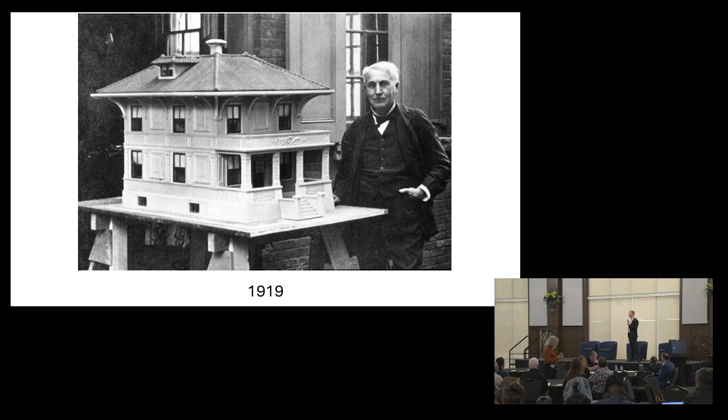Well, Edison built about 100 of these, and more than 95% of them are still in use today, about 100 years later. It's pretty awesome, right? Pretty amazing. But Edison's benefits, this is what his marketing terms were. He said, I'm going to build you an insect-proof, a mold-resistant, a home that does not rot, a home that's fireproof, a home that's designed for extreme events, a structure that will outlive the builder. But I'll tell you, Edison got that last one wrong. It didn't just outlive the builder, it outlived the builder and the builder's kids and the builder's grandkids and who knows what else. And that's the potential that's out there with well-built infrastructure.

And that's why people build concrete homes now. Not everywhere, but certain places people build concrete homes. Now, 3D printing is pretty cool because you don't need much of that formwork. Remember all that formwork I showed you earlier?

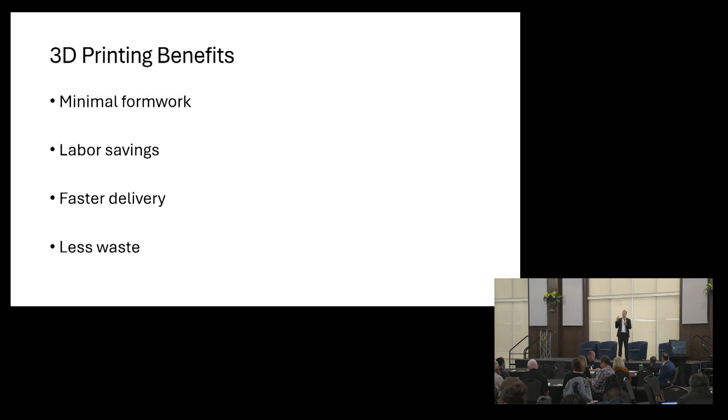Pretty complicated, pretty crazy, right? You don't need any of that anymore - it goes away. There's labor savings involved as well. There's faster delivery, there's less waste. There's so many benefits.

And people love to say you're going to get all the benefits of concrete with X% reduction in price. It's like, what is this professor doing? Put an X up there - what's the number? How much money is it going to save me? And people honestly don't know right now. They don't know how much money 3D printing is going to save them.

But actually, today, with modern techniques that most folks use, 3D printing is more expensive than conventional construction. And so they're like, well, why would I ever do it then? And you're right - that's why it's not everywhere.

But get ready, get ready. I think long term, X is going to be about 30%. So imagine buying a home, but it was 30% less expensive.

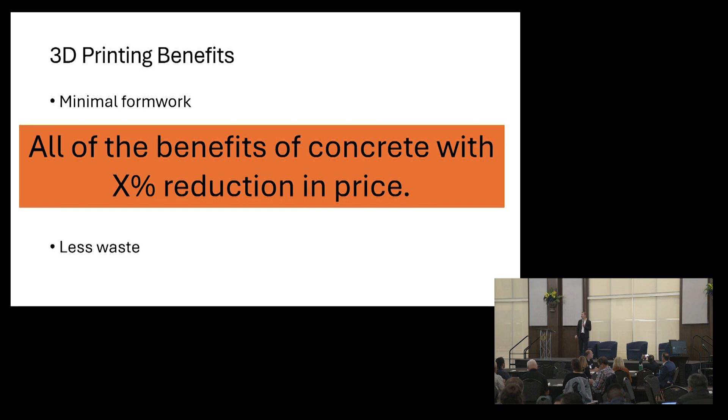Imagine your mortgage payment that was 30% lower per month. Could you find something good to do with that money? I know I could - I could definitely find something good to do with that money, and I bet you could too. And a lot of other people in the audience could as well.

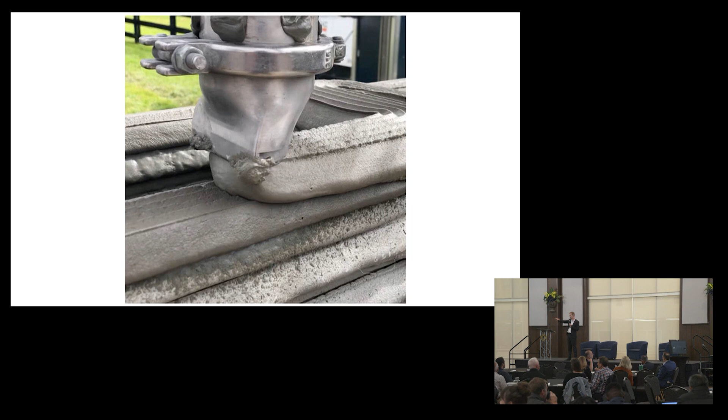Well, concrete? Is it really concrete? Does anyone see any rocks in that? Come on, geotechs, do you see any rocks in there? No, the geotechs - they don't want me to talk to them. But there you go, there's no rocks in there. There's sand, cement, and water. That's mortar, okay, that's in there. That's not really concrete, that's mortar, but that's what people are printing with today, right?

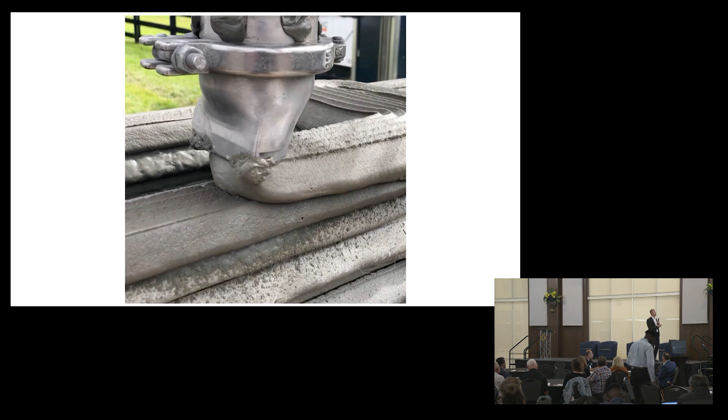And they look like this. Who thinks this is beautiful? I have yet to find - we got two people, right? Most people do not think it's beautiful. A few people do, okay.

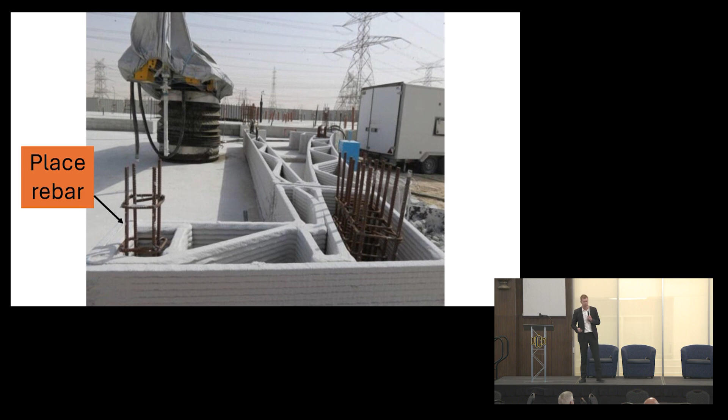But they usually print these cavities inside their concrete walls, and inside those cavities they put in rebar. See, rebar in there - wow man, this thing is not doing very well. They place rebar in there, then they fill those with concrete, and that's a lot of steps for 3D printing these days. A lot of steps.

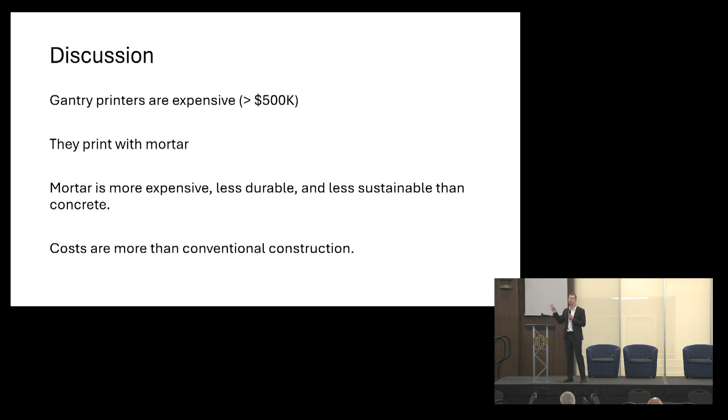So gantry printers, these overhead printers, are expensive. Most are around $500,000, all right? They print with mortar. Mortar's more expensive, less durable, less sustainable than concrete, and it costs more than conventional construction right now. It does, and that's why it's not widespread.

But now let's go back to 2017 for a second. Go back in time, see what's going on. This is Paul Tikalsky - he is my boss's boss. My boss is over there, but he's my boss's boss, right?

And he sends me an email one cold December morning. I'll never forget it. He says, hey, come and see me. And I'm walking across campus, I'm breathing - you know those cold Oklahoma mornings where you can see your breath, right? You can see your breath. It's that cold outside. I come walking, I get into his office, I take my coat off, I start to talk to him, say, hey Paul, what's going on?

He says, Tyler, I need a favor. That's never good when your boss's boss asks for a favor. And then he said, I need you to do something that you've never done before. Oh man, I was 0 for 2. And I felt in that moment that the room had just dropped 40 degrees in temperature. I felt like I could see my breath again in front of my face. It was amazing, it was crazy, it was chilled to the bone what's going on.

I said, well sure Paul, because this is a visionary guy, this is a guy I look up to. I said, how can I help? What's going on? He's like, our engineers today and our architects and our technologists are very focused on what they do, and they need to learn how to work in teams, how to work on multidiscipline problems, because the world's problems are solved by teams. We don't just do one thing, we do multiple things together.

You guys ever noticed that before? Anybody ever noticed that before? Geotechs, no, they don't know that. Everyone else though? Yeah, you've seen that before? Excellent. Well, that's awesome, because that's what he saw too.

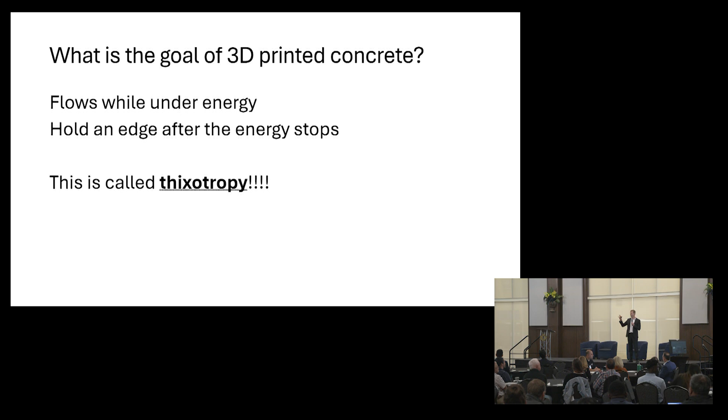What is the goal of 3D printing concrete? We want concrete that flows under energy and then stops as soon as that energy is actually taken away. And this, ladies and gentlemen, is called thixotropy. Ooh, that's the science word of the day, thixotropy. And if you don't know what I'm talking about, it's ketchup, ladies and gentlemen. We're making concrete that acts like ketchup. We actually studied ketchup intensely on why ketchup works, what ketchup is all about.

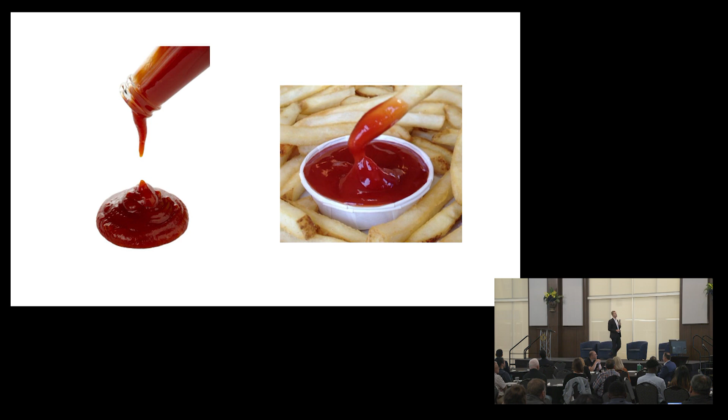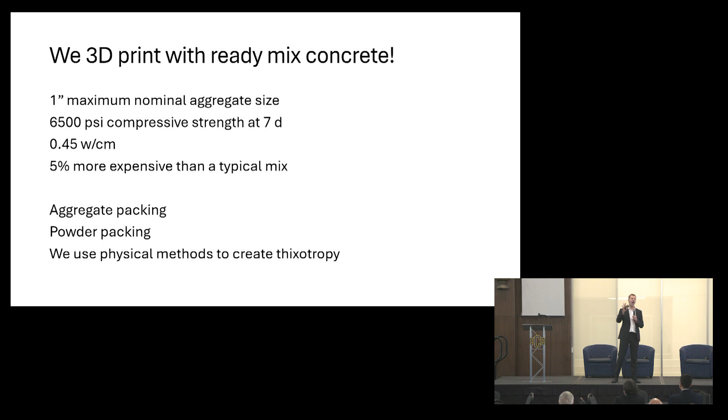Very, very big thing. So we make our concrete do this. But our concrete, we use 1-inch maximum nominal size aggregate, so large rocks. Our concrete is 6,500 PSI compressive strength at 7 days - we're not designing for that, that high strength just comes along for the ride. We use a 0.45 water cement ratio. Our mix is about 5% more costly than a typical mix. And we do this with aggregate packing, with powder packing. We use physical methods to create that thixotropy. Now, I'm not saying I don't use any admixtures at all - we do, admixtures are important - but we do it with physical methods. Because if you rely on chemistry for everything, then you're gonna have non-robust mixes in the field. So we'll rely on physical methods.

So let's talk about how this works. Notice that thing in orange there - that's our pad we're going to drive on. That pad needs to be level. It doesn't need to be made out of concrete, although it'd be amazing if it was. It can be anything, just stabilized soil, something level. Then we have a footing - does everyone see the rebar sticking up out? Does that make sense what I'm saying? Rebar - we print around rebar, ladies and gentlemen.

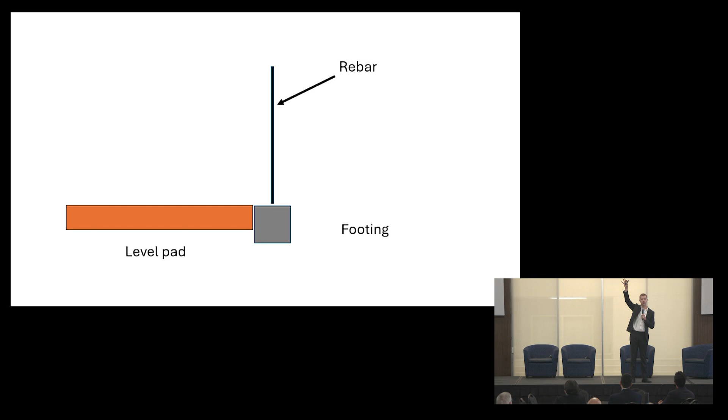So we have this cartoon here. This cartoon, it's got a hopper. The concrete goes in the hopper. We have an auger in the bottom that spits the concrete out. We have an arm that goes up and over the rebar and catches it on the other side. So everything happens in that box. It smooths it, it consolidates it, it finishes it, it gives us its form - it does everything. That box is magical, and I'm going to show you all about it coming up.

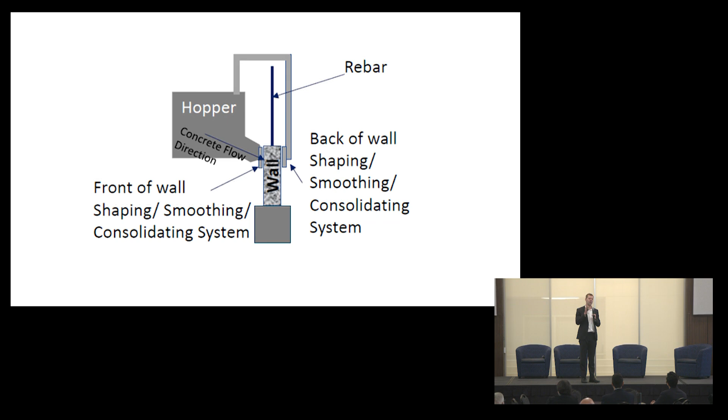This is what it looks like. So we see the hopper on the right. You see this extruding nozzle at the bottom, which I'll talk about in just a second. You see the magical box, and does everyone see that little tractor in the back? See the little white tractor in the back? Because, ladies and gentlemen, that's a skid steer or a tractor. And what we like to say at Oklahoma State is if you can rent a tractor, then you can print a house or a wall or a bridge or whatever. And I've already seen it in the faces. What?

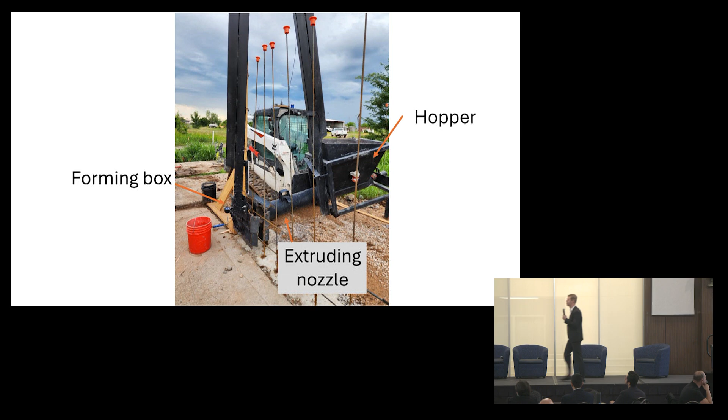Really? Yeah, hold on to your horses, ladies and gentlemen. Now, in that nozzle itself, right there, what's in there?

That in there is very important. There's an auger in there. If you don't know what an auger is, it's a screw that spins, that pushes material from one side to another. Pushes it, pushes it, pushes it, right?

And this thing is called the BAM printer, because you got to have a sweet name, right? And BAM stands for the Box Auger Method printer, because the box is really important and the auger is super important as well. So let's jump in.

So there is the BAM getting all lined up there. Rebar's already in place. The only formwork we have is at the very beginning and at the very end, right? And then there's the auger. There's everything lined up right there.

And let's look at this box. This box is magical. So many cool things happen in this box. So let's look inside of it.

Now there are 6 flaps to this box, 2 in the front and 4 on top. They all have hinges, so they can open and close again and again and again. So you can open it up if you want to get in the box, or you can close it down because it will consolidate inside that box, and I'll prove that to you coming up.

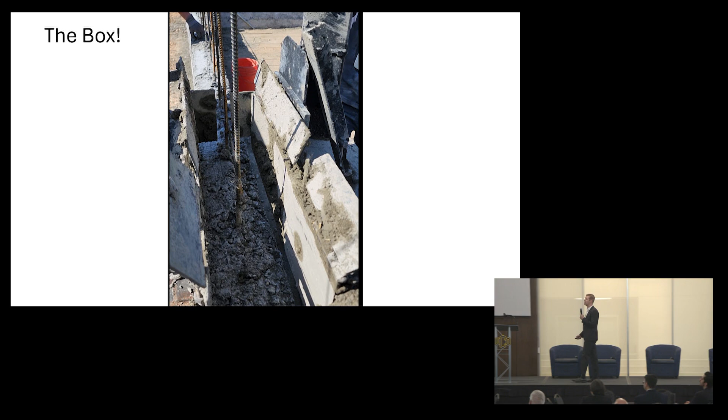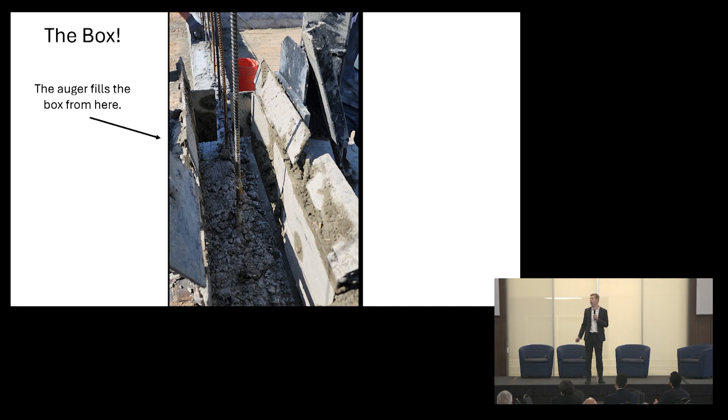Now on the side there, we actually spit concrete out from the side. We have an auger that spits it through the wall. So most people print from the top. We print from the side. It's really important because we can print around rebar that way. See the rebar? We're going to print around the rebar on the structure.

Still don't believe me, I get it. Here's the box, everything's closed down. See the rebar coming out there? Let's keep an eye on it. See the concrete? As soon as the concrete comes out of the top, as soon as it squeezes out of the top, you drive forward, ladies and gentlemen. And as long as it's squeezing out of the top, you know you are consolidating, you know you're getting the shape, you know you're getting the form, and it goes again and again and again.

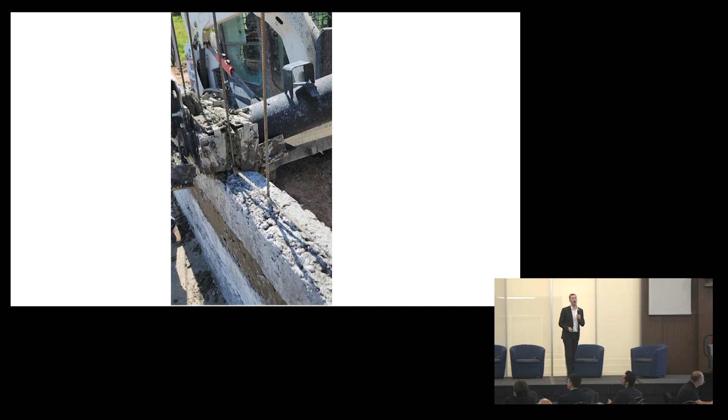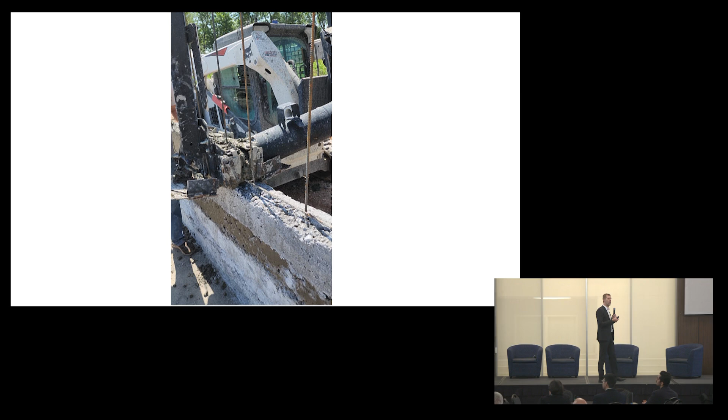And there it is, the same box from the other angle. That was the back, this is the front. Look at the concrete, you see it kind of creeping out of the front like ketchup? There it is, creeping out, creeping out. As long as it's creeping out of the front, you're good. You're getting the consolidation, you're getting the form, you're getting everything you want.

Pretty awesome, pretty simple, and we just do layer upon layer upon layer. People love to ask all the time, well, how long do you have to wait between layers? And the answer used to be about 30 to 45 minutes. But we have a new technology I can't tell you about yet that you don't have to wait at all. You can print immediately on top of one another again and again. You can back printers up. If you want to have 3 printers back to back to back to back, you can print again and again.

And we print 8 inches wide and 8 inches tall. Now, if the concrete is perfect, then we can do 16 inches tall, but it's tough to get perfect concrete in the field. If we're making it in the lab, not a problem, but in the field, it's a little more challenging. So here we go.

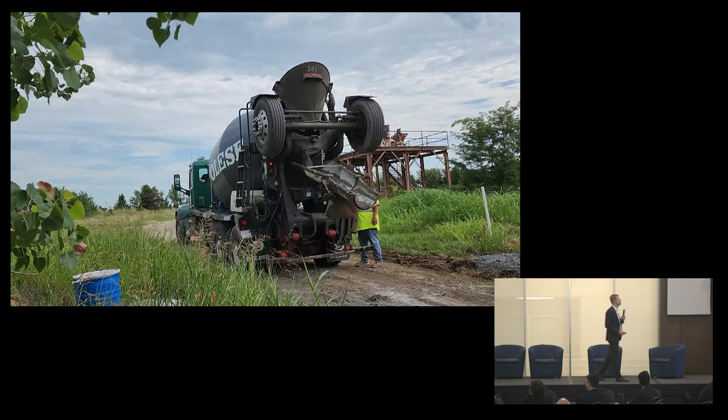Oh, look at that, look at that truck. Do you see that name on the side? That's a great company, Dolese. Thank you, Dolese, for all your help that you've given us on this project. I appreciate you. We did this with ready-mix concrete, local ready-mix concrete produced in Stillwater, Oklahoma.

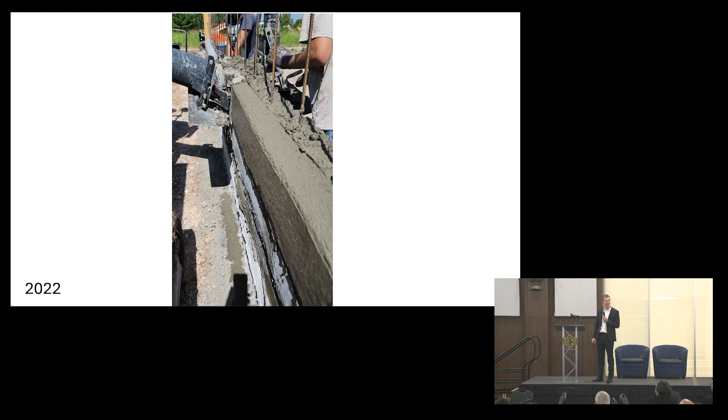And there is one of our prints. Now look at that left-hand side, isn't that looking good? Man, that's looking good. Well, what's going on the right-hand side? Well, one of our hinges broke, so we had to have a human pack it down. Just keep printing. But look at that left-hand side, looking good. That's 2022, okay?

Here is the middle-of-the-road mix, not the best mix, not the worst mix. And I'm having problems, 2022, we can see some surface voids. Now, one thing that's cool about this mix is you can finish it and fix it right there.

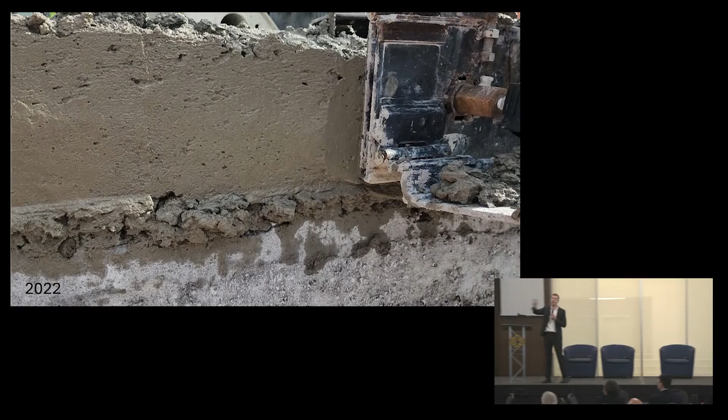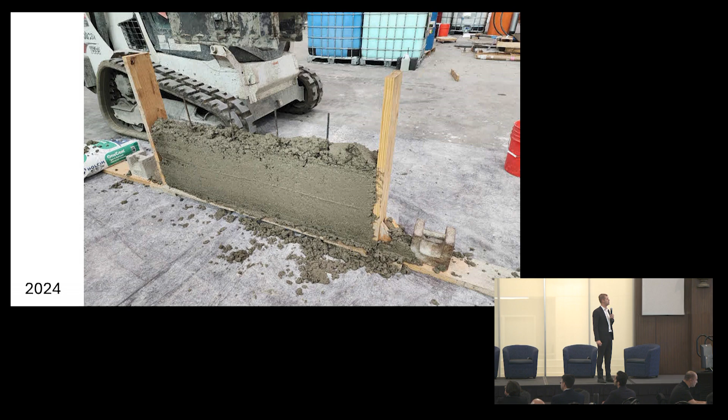If there's any problems, you just fix it up, whatever you want, right there. Pretty cool, right? Now here is 2024, this is about 2 weeks ago. Much, much better. We've come a long way in our mix in the last 2 years. Here's the other angle. Pretty cool.

You can do other cool stuff with this concrete, like this is me, and then you can just carve into it. That's 30-minute-old concrete. I carve into it about 3 inches and do an 8-inch wide thing. Doesn't collapse, nothing wrong, and I can patch it up immediately.

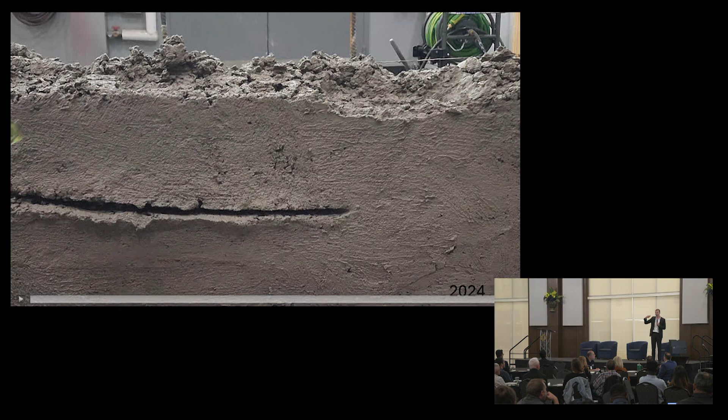Architectural folks, I don't know if there's any architects in the room, amusement parks have seen this, and they're like, holy cow, you know what I can do with this? They want to carve murals and stuff, and I can't wait. Can't wait. See like the Oklahoma land run carved in a concrete wall? Oh man, let's make that happen, right?

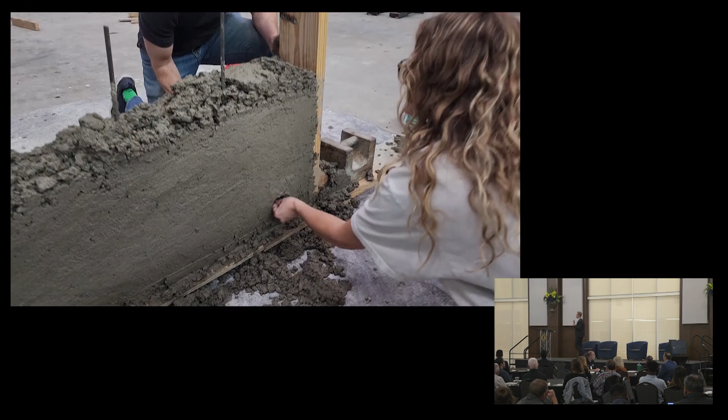Now here's another cool thing. Here's me kind of pushing, and what I end up doing is I take my entire trowel, my hand tool, and I just poke it entirely into the wall. And then there it is. There's my hand. Doesn't collapse. And then I patch it up.

I just patch it and finish it. This is a different kind of concrete, ladies and gentlemen. This is a different kind of concrete.

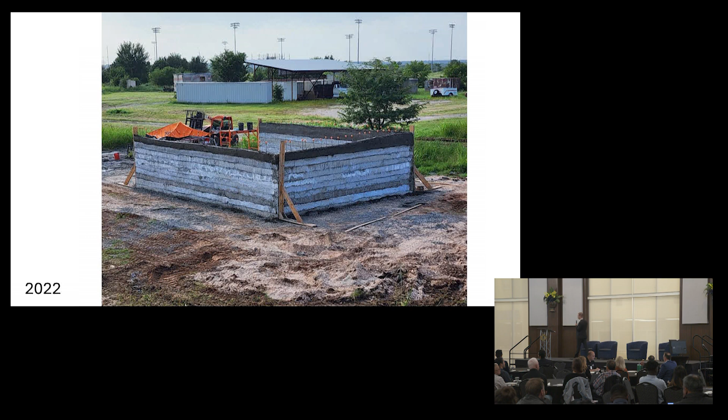Crazy, right? We printed a building, 2022. Pretty cool, 8-foot high walls, right? We printed a 30-foot by 20-foot building, 8-foot high walls. We did it in 14 hours, with $2,000 of rented equipment, $4,500 of concrete, okay, $6,500 total.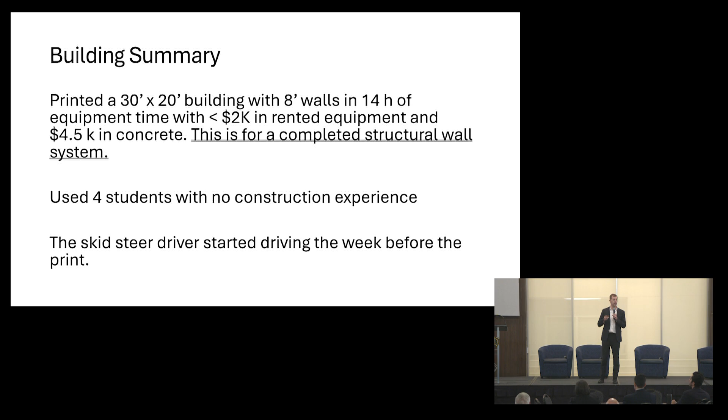We used 4 students, ladies and gentlemen, 2 high school students, 2 college students, no construction experience, okay? The person that drove the skid steer had never driven a skid steer till the week before. This is not an experienced group of people, ladies and gentlemen, that are able to do this, but our students are amazing, all right? This building is a research storage equipment facility for 2 environmental engineering faculty members.

We improved our designs, we filed 2 new patents, but we got real world costs. That's big time. Our 3D printed wall, now this is for an 8-inch thick concrete wall, 8-foot high with typical labor, not my student labor. I took how much time it took each one of the students to do all the work, took out their cost per hour, put in typical labor cost per hour, $12 per square foot.

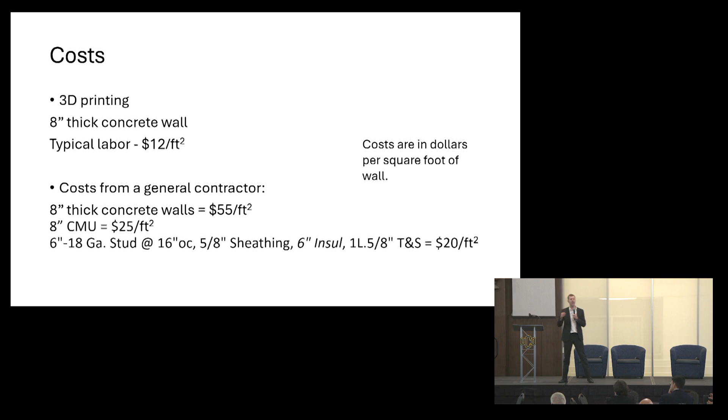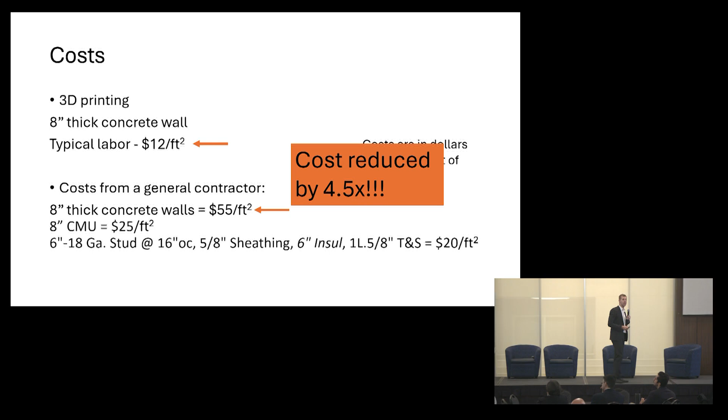You're like, well, that sounds cool and all, how does that compare to real world stuff? There's real world stuff from a general contractor for cost. 8-inch thick concrete walls, $55 a square foot. That's their cost in place. There's CMU, there's 6-inch 18 gauge stud. That's a 4.5 times reduction in cost.

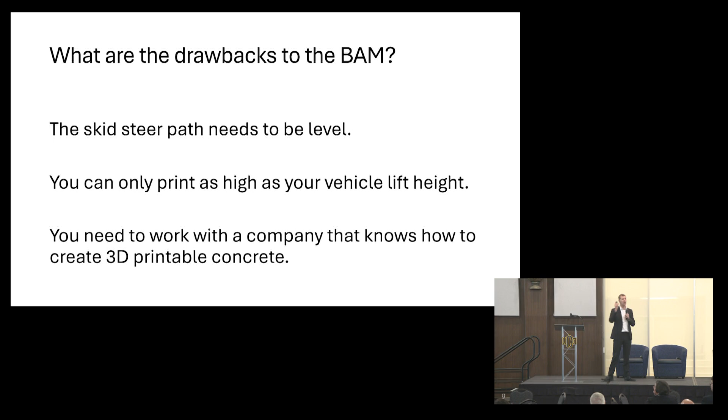So what are the drawbacks to the BAM? Well, you got to have a level path, and you can only print as high as your vehicle can lift. And you need to work with a company that knows how to create 3D printable concrete. Thank you, Delisi, I'm glad you exist. All right, you need to be able to adjust concrete in the field. That's a big deal, and it is not automated yet.

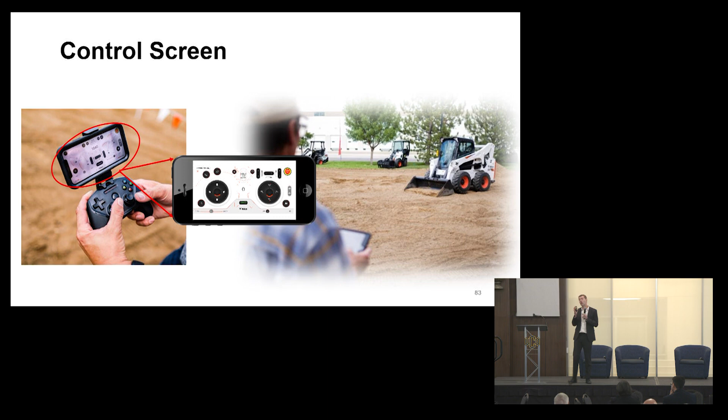We're working with Bobcat now where we can actually control our entire thing with our phones. We can hook this up to a video game controller. The students loved it, or at least we're in the process of doing that. And it's like playing concrete video games, right? Pretty awesome, right? But we're actually doing this in the lab. There's no driver, ladies and gentlemen.

There's no driver. So you remember the 4 folks I had before? I could easily do that building now with 2 if everything was perfect. But in construction, not everything's perfect, so 3 is probably where you need to be. But what's next? Make everything better, add automation, get the feedback from industry. That's a big deal. So, hey, do you know someone that'd be interested in this? That's my big call to action.

Do you know anybody that would think this is cool? Do you want to come see it in action? Do you want to come see our building that we've made? You can email me, talk to me.

So in summary, 3D printing with a tractor has shortened our construction time of this building by about 7x, reduced our cost by 4x, reduced our number of workers by 2x. Those are the 3 big challenges that I said were facing us today. This is a way to attack all 3 of those in what we do.

And this is all compared to conventional cast-in-place construction. So listen, this has been a cool day. I always love coming to this event. And listen to me right now. If you're at this event, then there's a little piece of you that wants to make the world a better place. And for this quote, oh my gosh, what is this?

This quote is for you. It's not easy. It's easy to say, it's not my community, not my world, not my problem. Then there are those people who see a need and respond. And I consider those people my heroes. And if you're here today, you are one of those people, and you are one of my heroes. Thank you so much. I appreciate you. Take care.

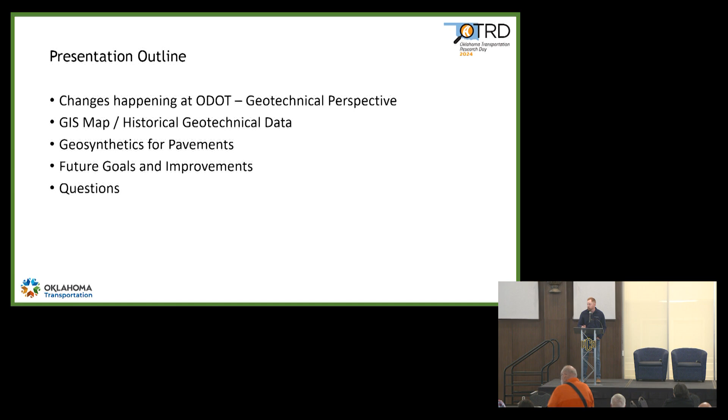Yep, there we go. So what I'm going to talk about is the changes that are happening in ODOT. There's a lot happening, not just in geotech, but I'm going to focus on the geotech side of it. I'll talk about a GIS map that Scott's group in materials has been putting together and the benefit of that, and how it's going to help the geotech industry going forward. And then I'll talk about geosynthetics for pavements. It's a big topic. Let me just grab this. It's a big topic that has been brought up ever since I started, and we're going to talk about how we're going to implement the geosynthetics, get the most that we can out of them, and hopefully save money in the long run.

And then talk about future goals. This is only a 15-minute presentation. I'm going to keep everything very surface level, but talk about future goals with ODOT when it comes to geotech and improvements we see making, and then I'll hopefully answer a couple questions at the end.

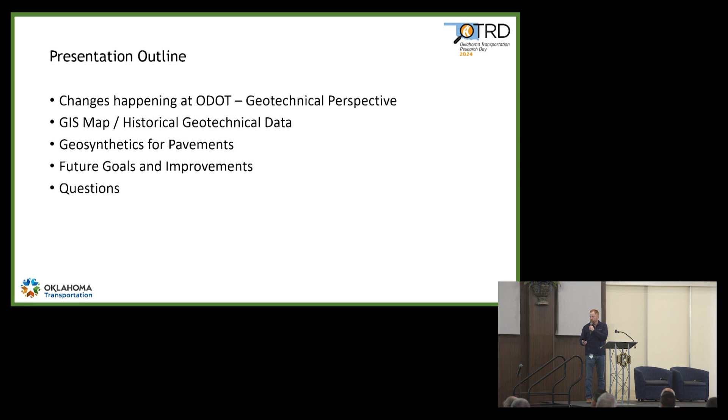Hold on. There we go. All right. So the geotech group at ODOT, I started about 18 months ago now, and I'm the design geotech engineer. The job didn't exist before that, so they kind of put me as a central figure to coordinate between the geotech consultants that we rely on, and then Scott, who manages the materials group, and then the pavement design engineers that work in the roadway division and the bridge division's geotech engineer. So I'm kind of the central source.

I help a lot with processes and helping them, if they do need some technical help. For the most part, they have their technical stuff figured out. But my main role is to help be the central contact with the consultants, and help them understand what the expectations are from ODOT, get the processes that they're following to be consistent from company to company. Yeah, basically trying to be a central point of contact. Before, ODOT had all these different people they could contact, but they didn't always know who to contact. So for geotech, I'm kind of the main deal, and then I'd obviously reach out to Scott or Amanda with pavement design if they need more technical help.

So changes happening at ODOT. Consultants - we've grown a lot more reliant on them in the last couple decades. I'd say up to about 2000, ODOT did the majority of the geotech work in-house. But with the amount of workload and how personnel has changed, consultants have taken on more and more of that task as we've gone. So as they've taken on more of a role, we've obviously grown dependent on them, so we need to take care of them.

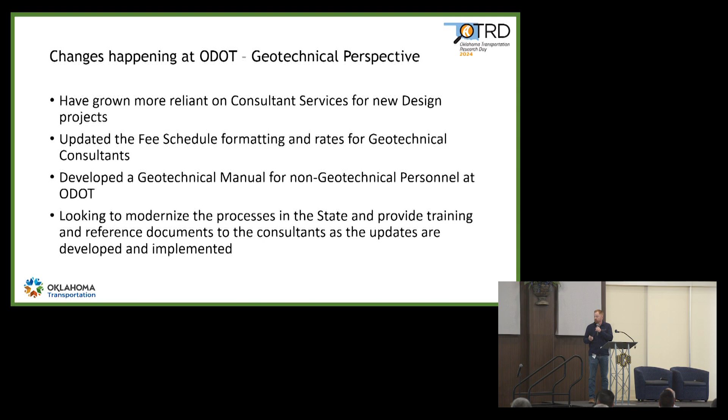Let's see if I get this to work again, hold on. All right, GIS map - this is Scott's group, they've been working on this since I showed up, and this is going to be a super cool tool going forward. I'm hoping it'll be used for decades, generations to come.

Geotech data - you're working with soils and bedrock information, and it's not changing all that much. The soil is what it is in an area, the bedrock elevation isn't changing over time. ODOT has a lot of data, so much data. Using that data to improve our processes going forward, and not having to pay for the same service over and over again at a similar location, is kind of what we're striving for.

So Scott's group had these boxes - how many boxes do you think you had, Scott? Just filing, yeah. So the old geotech submittal format was just a hard copy of a bound report up until about maybe 15 years ago.

Since then it's been all PDF, but before that, for decades it was just a hard copy. They'd send some to ODOT, and after they were used for that particular project, they'd go into a box and get stored - copies were made, of course. Well, all this information is good information. There's good soil information in there, a lot of good stuff.

You can get groundwater information, all this stuff. Potentially that stuff could have just got thrown away, never to be seen again, but the direction we're going is, hey, this is good information. Let's not lose history. Let's scan it all, which Scott's group and Chris have been doing for a while, saving it into a GIS database to where it's going to be searchable, usable, not just for ODOT, but for the consultants going forward.

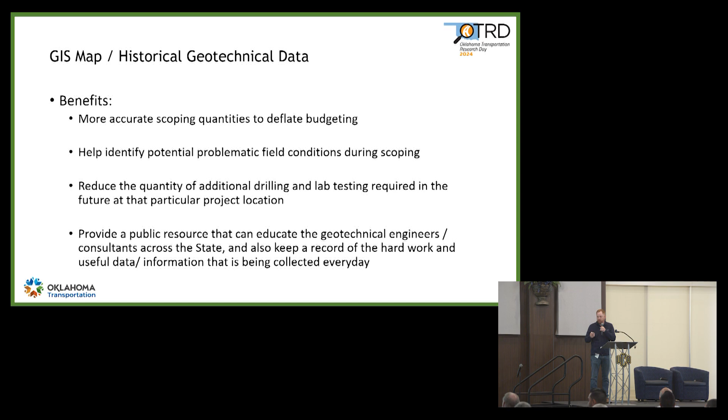I would have killed for this as a geotech consultant, just having this much information available. You can search by county, JP number, the year the report was done, all these different types of reports - pedologicals, bridges, all these things. You'll be able to search it, find information, try to find stuff that applies to the project you're scoping. It's going to be great whenever it's all done.

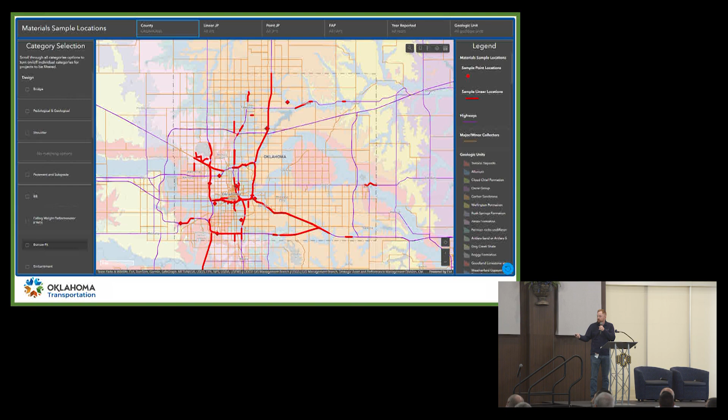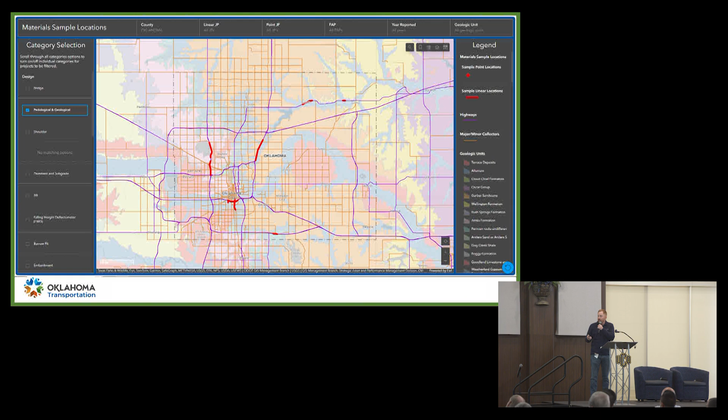So for this presentation, I just showed you an example of what it can do. I picked Oklahoma County because that's where we're at. So what you do is click Oklahoma County, it zooms into the county, shows you all the projects within that county. Then say you want to see an example of a pedological report - it'll zoom in and show you where the red is, where the pedologicals are. You can see there's probably about 7 or 8 pedological reports for the county stored in the system.

Say you have a project maybe like in Arcadia on Route 66 - what's the soil information like over there? You can click on the red and it'll highlight that and show you the report, which I didn't go through showing all that, but you can get the report from there, get the JP number assigned with the project that the study was done before. With that, you can potentially ask for as-built plans. You get all this information that was done previously, and you're not basically starting from scratch as a geotech, which is a lot of times how I felt. But having additional information makes you able to make more educated plans, more educated scoping plans, and helps the project as a whole go better.

So to reiterate, the end goal of this is to save ODOT money by not doing redundant testing and drilling, allow geotech consultants to provide reduced scopes and more accurate budgets, and create this digital library. I love the idea of having a geotechnical library for ODOT stuff. This can be continued for 100 years, and you'll have all this data from the 1950s all the way up to what we're doing now. I think it's going to be very helpful.

And then eventually, with AI, maybe there'll be a way we can search this, and you can have some sort of system in place where you can look up these old reports and get data from that. That's out of my league, obviously - I'm a geotech engineer, I don't deal with AI very much, but I think it'll be useful.

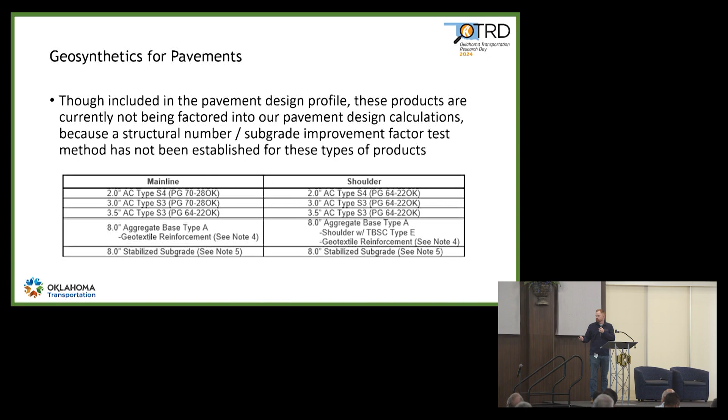So geosynthetics for pavements. This is a big topic that has been brought up since I started. The main purpose geosynthetics serve in a pavement situation is they either provide separation of the base layer with the soil, filtration with water, and subgrade stabilization if there are soft subgrade conditions. The geosynthetics we use are woven geosynthetics that claim to provide all three of these services, giving you the filtration and separation that a separator fabric would do, but also the reinforcement that a geogrid would do.

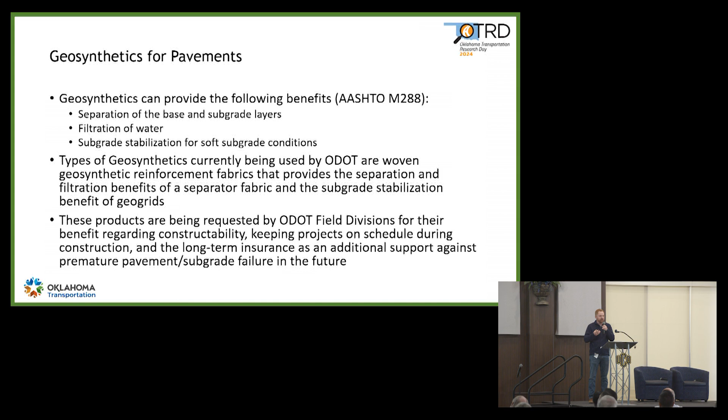These products are typically requested by the ODOT field divisions due to their help with constructability. Whenever you're building a road out in Oklahoma, say you do all the earthwork and there's a massive rainfall event that comes in, you can delay the project by quite a bit because you have to wait for everything to dry and may have to rework the soil. What they've been doing is stabilizing the subgrade in areas where that's allowed, then using these fabrics as a cover to protect the subgrade.

All of this is great - it's good to use, but there should be some sort of structural benefit to that as well when it comes to pavement design. Right now we have it in our pavement design sections, but we're not actually using it structurally - you're not able to reduce anything from that. So our goal is to see what benefit you get from these products structurally, and then be able to save money by thinning up the asphalt, potentially reducing the aggregate thickness, that kind of stuff.

So this is an example of what a pavement section looks like these days.

We obviously have asphalt or concrete, and then you'll have your ag base, and then you have this geotextile reinforcement, which is these geosynthetic fabrics over stabilized subgrade. It's a lot. The actual structural calcs are mainly handled by the asphalt and the aggregate, and really everything below that is not really structurally being used.

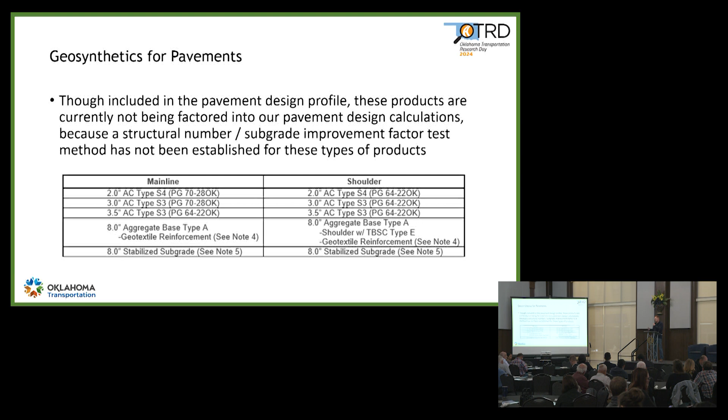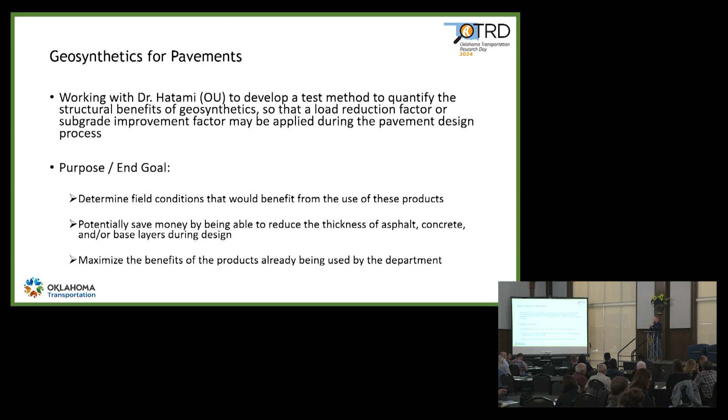So going forward, we'd like to, since we're paying for it, know all that it does and hopefully get all the benefits out of it. So we just started this project with Dr. Hatami where we're trying to develop a test method to quantify the structural benefits of geosynthetics, so that a load reduction factor or a subgrade improvement factor may be developed. The idea is to be able to thin up these sections and structurally apply it into either Pavement ME or AASHTO 93 as you do your calcs.

Determine field conditions that would benefit from these types of products. Like I showed you before, we currently are using it in situations where the subgrade is already stabilized. I don't know how much of a benefit you're getting whenever you have a hard underlayer with these kinds of fabrics. Obviously, you need some sort of deflection for the fabrics to really provide a structural benefit, but that's what we're going to figure out from this research. What situations does it make sense to use it? When do you actually need it for a structural situation? And if they want to use it for their construction, that's fine, but I want to make sure that we know when we can actually apply it to the pavement design process.

Potentially save money - that's always my number one goal with a lot of what I do - and then maximizing the benefits of the products the department's already paying for. So ODOT's already putting this on all their projects. Let's make sure we're getting everything out of them.

Okay, future goals. What is the new stuff coming up? There are a million things to update with geotech. We were kind of stuck in a certain way for a while, so a lot of the stuff we need to update. We are going to be looking at our geotech spec - that's basically our recipe book that we use for our geotech studies in the state.

I'm going to be working with Scott, and working with the designers, trying to figure out what design parameters are actually needed for everything, making sure we're doing the right testing, making sure we're not doing too much testing - another way to potentially save money. Just get that fine-tuned to where we can move forward, being confident that we're doing the right thing.

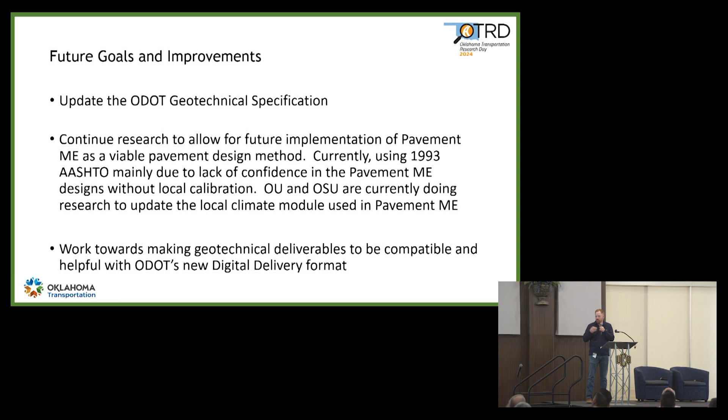That's a long-term kind of update that we're gonna be working on. Hopefully if I come back next year or the year after, I'll have updates on this kind of stuff too. Like I said, this is my email. If you guys ever wanna have any ideas, geotech research ideas, reach out to me. I can give you some feedback. I'll be happy to answer any questions if anyone has anything, for sure.

Of course, yeah. All right. Well, anyway, my email's there, so. Sorry about that. Just right. Great, thanks.

So in terms of what I'll talk about today, I'm going to talk about the evolution of this concept. As most things, people have tried different things and the concept has evolved to where it is now. We started with hollow core concrete columns, then concrete filled tubes, and now the double tube concrete filled that I'll talk about today. And then in terms of our research project, our specimen design, fabrication, testing, our forensic investigation, and then thank yous, and if there's any time left, questions.

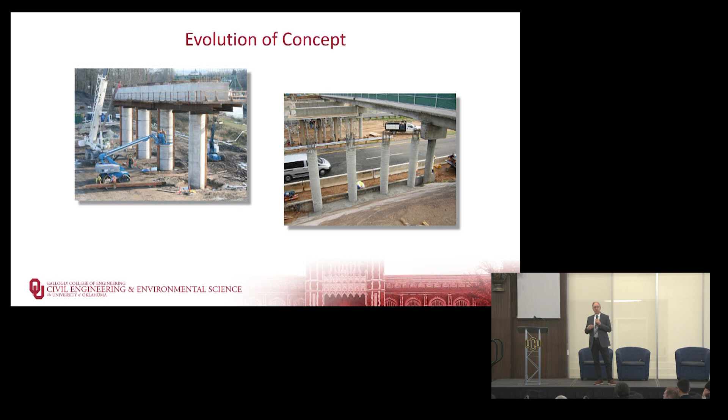I know I'm the last presenter before lunch, so you're probably not going to have any questions because you're hungry, but that's okay. So in terms of most of our bridge piers, most of the columns for our bridge piers are typically made out of reinforced concrete, typically circular, multiple piers supporting a pier cap. They can be rectangular or square. Sometimes you have the hammerhead shapes, but typically done out of concrete, cast in place. You have to build the formwork, the cage, you have to build the forms around it, you have to pour the concrete. And so there have been a lot of gains in terms of accelerated bridge construction for bridge superstructures, but not as much for bridge substructures. We're still doing a lot the same, and that's the concept that I'm going to talk to you about today.

So basically, we take a steel tube and an FRP tube, and then we fill up the center with concrete. So we call it a double wall concrete filled tube. The benefit is that these different materials help each other.

The FRP tube acts as a stay-in-place form. It also provides resistance to chlorides and other deleterious materials. The concrete core gives a lot of compressive strength, but also braces the FRP tube and the inner steel tube. And then the inner steel tube and the FRP tube provide confinement to the concrete, which increases its apparent strength. And then the steel provides the ductility and the flexural resistance for the column.

You have no formwork. All the final structure is the actual formwork. You have no reinforcing cage to tie and install. You simply construct it rather quickly.

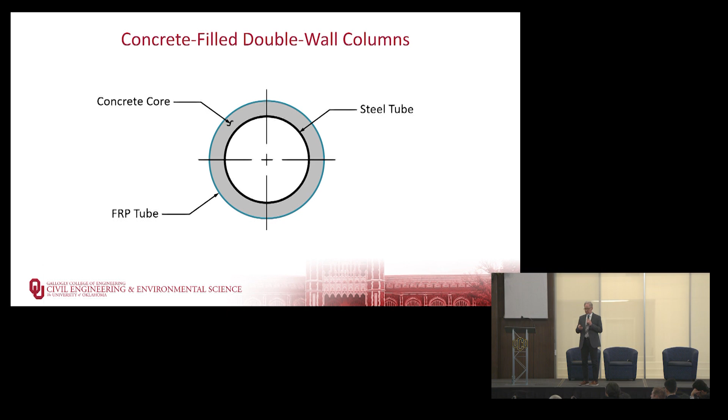So you pour your foundation. Typically, we do drilled shafts for a lot of our bridges. Put in your steel tube, get it in the right place, cast the concrete for the drilled shaft, come back and put the FRP tube on it, and then cast the concrete in the interstitial space between the steel tube and the FRP tube. And then you do that for all of your bridge columns, put the pier cap on, and you're done. So you could cast this column in a day.

As soon as you put the steel tube in, cast the drilled shafts, come back the next day, throw the FRP tube on, cast the concrete in the middle, the column's done. So very rapid construction. But then the question is, how does it behave, right?

As a structural engineer, I'm like, yeah, that looks a little, I don't know, right? Reinforced concrete, I'm very comfortable with. Steel, I'm very comfortable with. It's kind of new. As civil engineers, we tend to be a little conservative. So we had to look at it and how does it behave?

So a lot of researchers have done some studies on this with different construction pieces. A lot of times there's with normal concrete, different sizes, different test methods, right? A lot of our equations take a lot of testing and a lot of proof before we're able to use them. But there are some initial sizing guidelines.

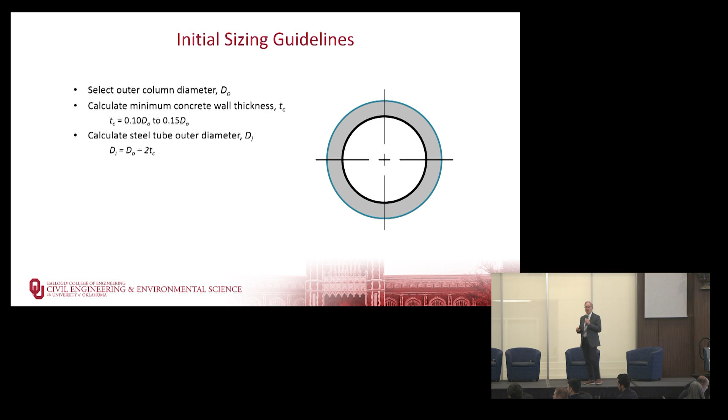You pick your outside diameter, which you can use typical column sizes that you use now to get started. And then you pick the concrete wall thickness, which is about 10% to 15% of the outside diameter. The steel tube diameter is based on subtracting the diameter of the FRP tube and the concrete to get to the steel. Steel thickness is somewhere between a 64th and a 32nd of the diameter. And again, these are guidelines just to get started.

Just like everybody knows, the structural engineers know that design is an iterative process. You don't know the answer till you know the answer. So some initial design guidelines help you get there quicker. And then the FRP tube thickness is based on whether you're in a low seismic area or a high seismic area, the compressive strength of the concrete, and the hoop tensile strength of the FRP.

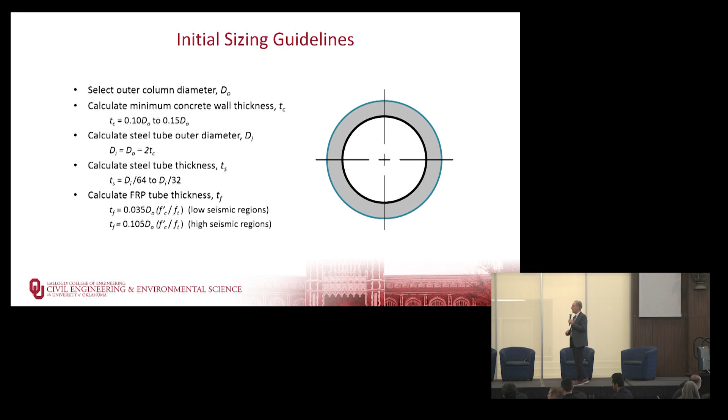So this is our test specimen. It has a concrete base, you have the column, and then a loading stub at the top. Essentially, it's a flagpole that we're going to push back and forth with cyclic loading, which is kind of how our bridge columns work.

So our column was 8 foot tall. The FRP diameter was, because of standard sizes, we want an 18-inch diameter column. It's about 18 5/8 of an inch. The tube thickness of 3/16, we went with the thinner value. The steel tube was 12 3/4 of an inch diameter, again, standard sizes, 1/4 inch thick. Again, we went with the thinner ones for these first set of specimens. And that gave us a concrete wall thickness of 2 3/4 of an inch, which is not a lot, but we'll talk about that in a minute.

The FRP is glass fiber reinforced polymer, standard tubes, 40 KSI hoop stress. And then the steel tube has a yield strength of 52 KSI and an ultimate strength of 66 KSI. So we're going to put a nominal axial load on these specimens and then push them back and forth in a cyclic loading.

We use high strength SCC, right? We want concrete that can flow very well to get into that 2 3/4 inch space. And again, if you have a concrete that flows very well, again, less labor involved. You just pour it in, you're done. You don't have to vibrate it. You don't have to do anything.

So we use high strength SCC with a compressive strength at 28 days of 10 KSI. And we used our UHPC mix we developed at the University of Oklahoma with a target strength of 20 KSI. Technically, UHPC is 21.7, but we figured doubling the strength would work well. And both of those concretes flow very, very well. Tyler showed you how essentially UHPC is also a mortar, right? It's just sand and cement and water and high range water reducer. So it's a mortar with fibers in it.

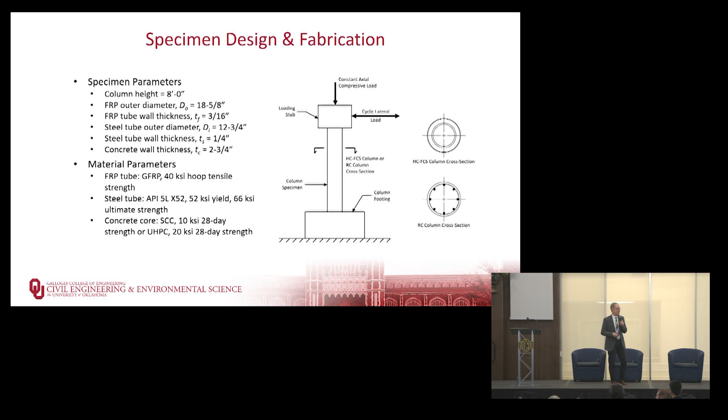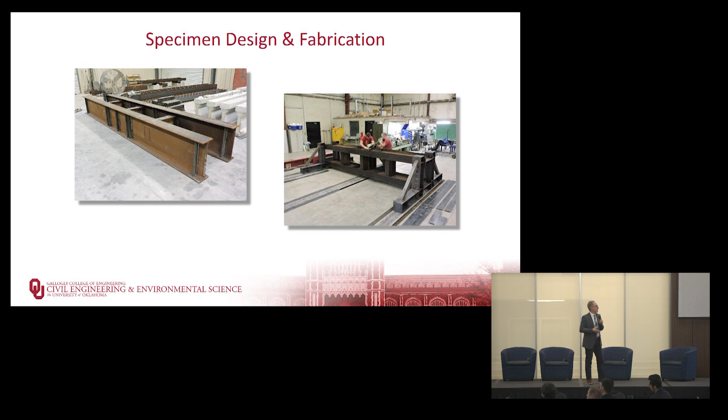Because we only have a strong floor out at our lab on the south campus of University of Oklahoma, it's kind of hard to test a vertical column. So we developed a test frame so we could lay the column on its side and then test it.

And these are the FRP tubes that came pre-cut, the steel tubes that came pre-cut, and then we built our specimens, and a reinforcing cage for the base.

So we built our formwork for the base, we put in a rebar cage, we put in our steel column at the right depth of embedment. Typically it's right now 1.6 times the diameter is the standard. Some of our research shows a little bit bigger value, but you want to make sure that steel tube doesn't pull out of your foundation.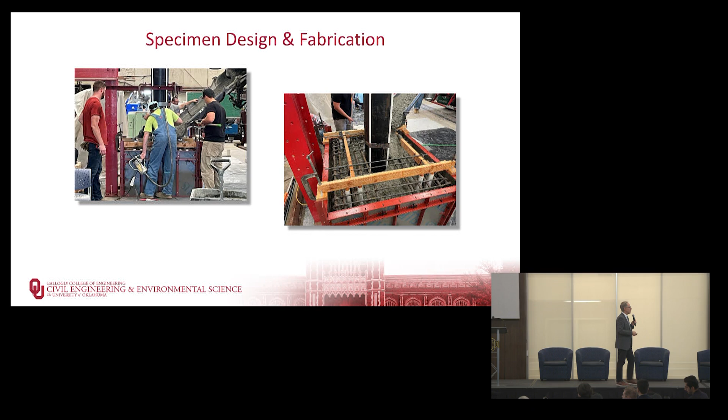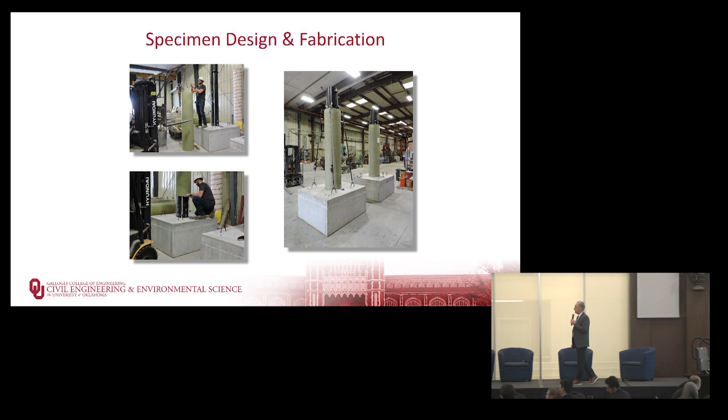Cast the concrete for the base, remove the formwork, put on some strain gauges on the steel tube, slip the FRP tube over the outside, using spacers to get it in the right place. Put strain gauges on the FRP tube. And then cast the concrete.

This is the high strength self-consolidating concrete, compressive strength of 10 KSI. No vibration required, pours, filled up the space very well. Again, this is about an 8 foot tall column using a chute from our concrete bucket. Flowed very well. After our forensic analysis, there were no voids in it at all. And again, there's no reinforcing cage inside that where the concrete is.

And then we have the UHPC, which also flows very well. For those not familiar with UHPC, I know Tyler talked about his mortar being kind of like ketchup. I kind of look at UHPC, it's like Nickelodeon slime. For any of those familiar with that green stuff, it kind of oozes out of your hand if you hold it, but it just flows forever. So it works really well in that very tight space.

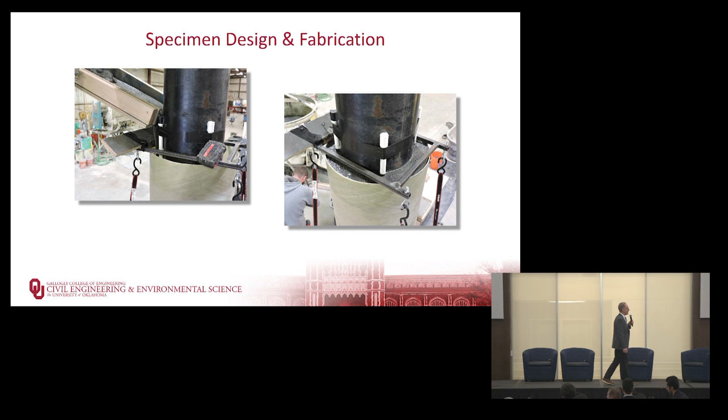And then because we were having to lay the columns on their side and test them, and develop our own test frame, we wanted to make sure it would give us valid results. So we also cast a couple reinforced concrete columns, just standard circular reinforced concrete columns with spiral ties, that we could test initially and compare to previous research, since there's a ton of research on reinforced concrete, to make sure our test frame was indeed testing them in a valid way.

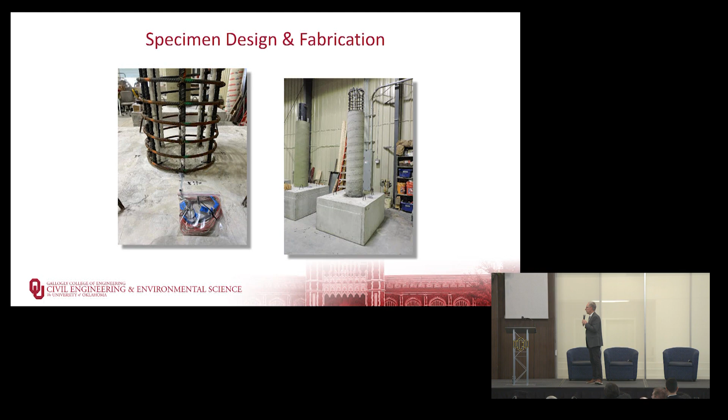I think this thing's possessed, by the way.

Because we only have a 5-ton crane at Fears, with the loading head installed on the top it would have weighed too much. So first we had to move it, lay it over, get it in the test frame, and then cast the loading stub at the top.

We applied our nominal axial load using pre-stressing. We just use axial pre-stressing, 4 half-inch diameter special strands, cast within the column, that we would pre-stress to get our 80 kip axial load that stays constant during the cyclic testing. And that's what those white tubes are.

So here's one of the frames, one of the specimens in the frame getting ready to test. You see the crimson frame here in the back. This is our base, we've anchored it with high strength rods. This is the column test specimen, the loading stub. These are the pre-stressing strands that apply the axial load.

And then this is our hydraulic actuator. It's a push-pull actuator, so we could push it in each direction, then pull it back in the other direction. And then this is our 100 kip load cell. Our data acquisition system, you can just see these red wires. These go to the strain gauges on the FRP tubes, on the concrete tube, or the steel tube. And then there are wire pots on the other side to measure the displacement of the columns.

And I love my graduate students. When we first showed them we were going to test it that way, they're like, oh, that's not the way a column works, the dead weight of the column is going to throw everything off. And I was like, no, we're putting 80,000 pounds on this, the dead weight of the column is minuscule. So don't worry about it, it'll be fine.

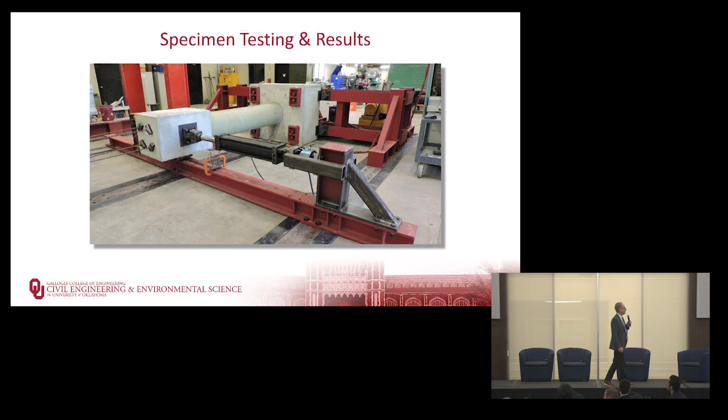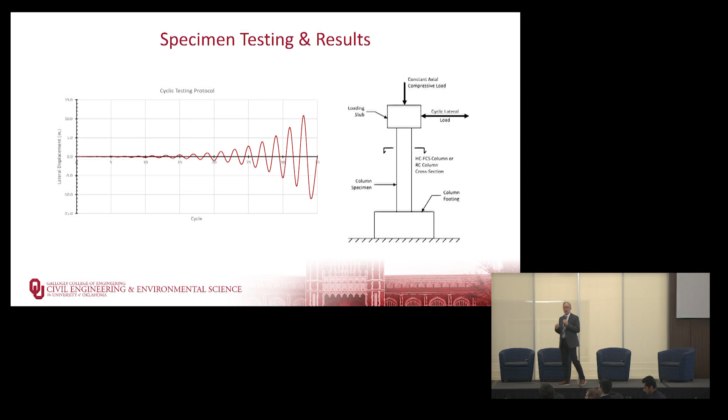The loading protocol is based on a typical loading protocol for cyclic loading of columns. It's a FEMA guide where you start out with a small push and pull displacement-wise, and then each subsequent cycle you increase by 40%, and do 2 cycles at each displacement. So this is a displacement-controlled test, as opposed to a load-controlled test.

So then we look at our plots. Engineers, we love plots. This is going to have displacement on the horizontal axis up to 15 inches, so the marks are 5, 10, 15. Load, either compression pushing out or tension pulling back on the column, all the way up to 50 kips.

This is our typical hysteresis loop for a column tested with cyclic loading, this is our reinforced concrete column. You see an initial linear elastic response, and we push it off very slowly, a very small amount in the beginning, but we keep increasing by 40%, so it increases pretty quickly. So you have initial linear elastic response, then the steel...

You got a circular column, so the steel farthest on the outside on the compression and tension faces starts to yield a little bit. The concrete in compression starts to become slightly nonlinear. Because the concrete column is poured on top of the base, it's not integral with it. You have some bond there, but eventually you break the bond and you become more and more nonlinear.

And then out here somewhere, we actually start buckling the longitudinal steel in the reinforced concrete column, and then eventually fracturing. And we got up to about 10 inches.

So this is an 8-foot tall column that we wanted to push a foot in each direction. So in one direction, that's a drift ratio of 12.5%, which is huge, right? An 8-foot tall column moving a foot. If you saw that in a bridge, that would be kind of scary.

We push it 1 foot, all the way up to 1 foot in both directions for the peak response. And we compared this with research on reinforced concrete columns. The behavior was very typical. So we felt like our test frame of loading, turning the column on its side and testing it, worked very well. So we were ready to test our innovative columns.

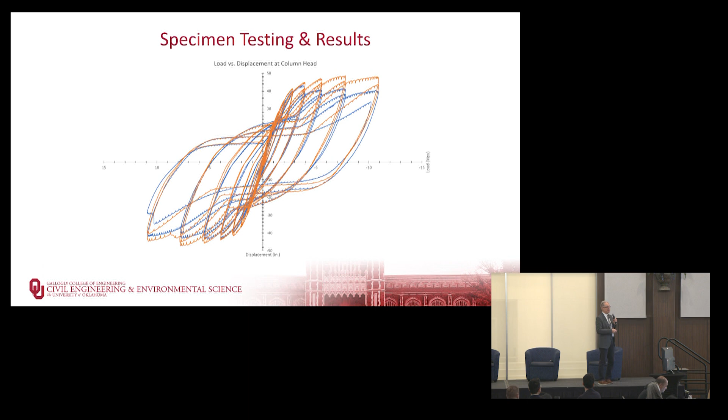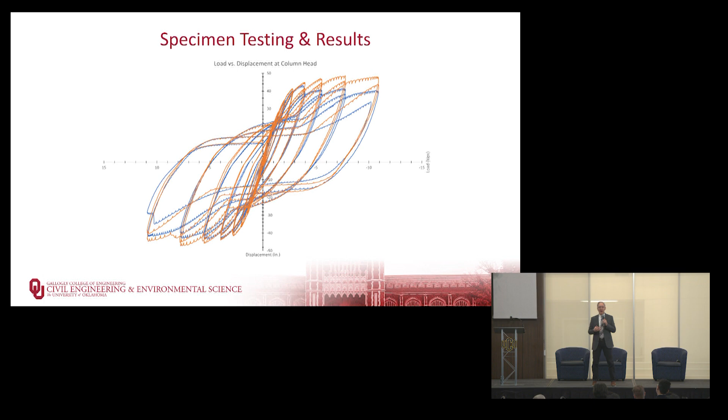And again, the important thing when we talk about durability, resilience, ductility - we all know that inside that hysteresis loop, there's energy being absorbed. That's why you want a nice, ductile response during an earthquake or a seismic event or an impact. Anything that puts a dynamic load on your columns, the fact that they can absorb energy makes them more resilient. So these are behaving very, very well.

So very typical behavior. We did that to make sure that our test setup was accurate for when we tested our new columns, and everything looked really, really good.

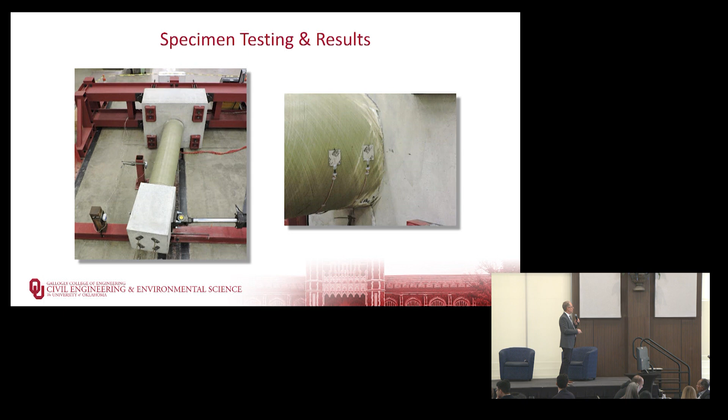And then we strip off the FRP, take the load off. We start looking at the concrete that started to crush in compression, started to pulverize. Typical for even a reinforced concrete column, the core was still keeping fairly strong. Again, no bond to the footing.

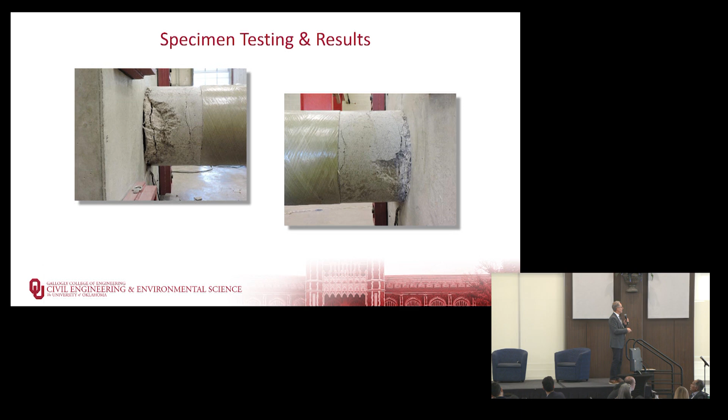And then we look at the steel tube. You can see how the steel tube is buckled. Actually, with the self-consolidating concrete, it actually fractured. So it was a low cycle fatigue where we fractured the steel tube.

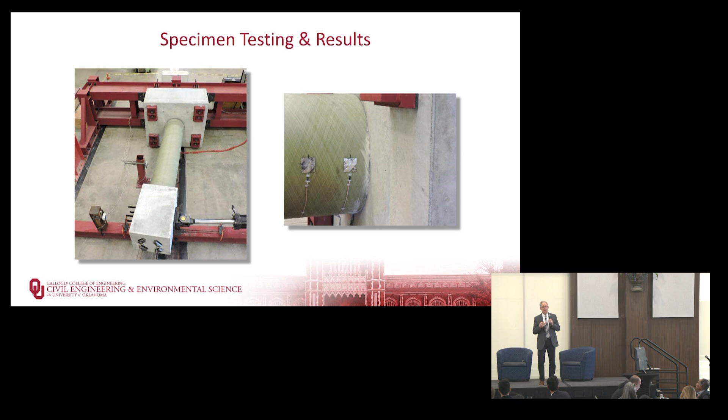And again, looking down. And then this is one with the UHPC core. You can see near failure, there's not as much failure of the FRP because the UHPC is providing a lot of confinement because of the steel tube, the steel fibers inside of it.

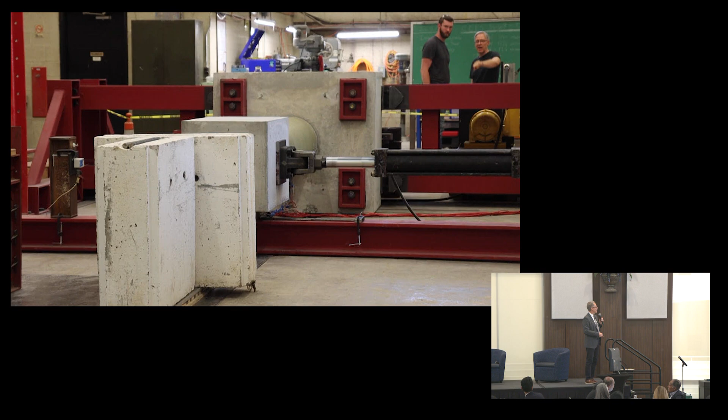Then we opened up, it looks in really, really good condition. There were still some fractures, some cracking, and then removing the FRP, the UHPC, you can see the fracture. Oh, back up, back up, back up. It won't back up. There we go. So you can see the steel tube.

With the UHPC, the steel tube buckled in a much more three-dimensional way because of the extra confinement of the UHPC, which increased its apparent strength. And we did not fracture the steel tube for the UHPC column, and we tested two identical specimens for each of them. And then looking down.

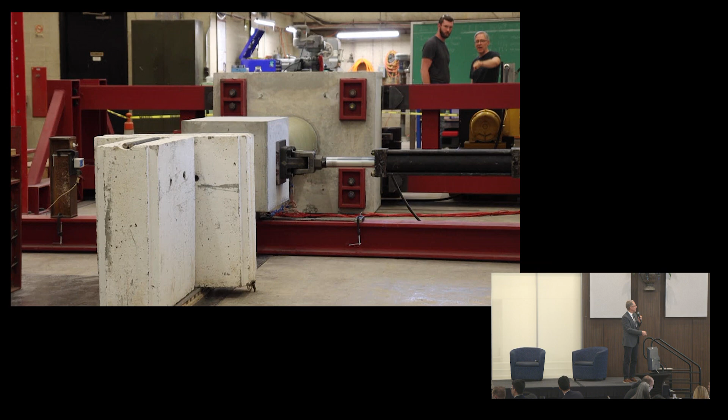And then this is a video of a test - it's a time-lapse photo, pushing it back and forth, just to give you a sense until you see it in person. We had Gary and Walt out during one of our tests to see it, and you see how much we're pushing it, again, a foot in each direction, which is huge for an 8-foot tall column. And yet the one with the UHPC, we could actually not fail. The one with the SCC did extremely well.